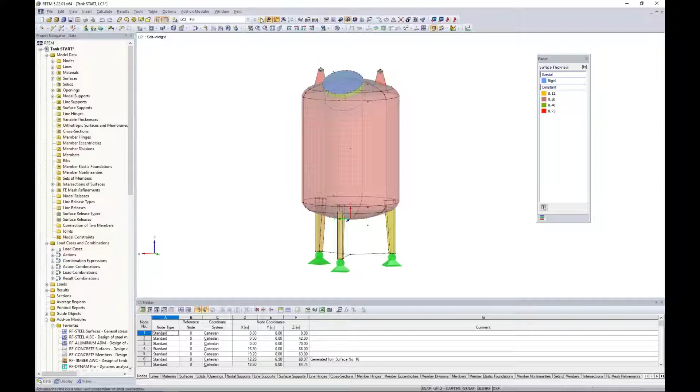We also had applied the loads to the structure, and we can see that within our drop-down box here are our different load cases. We have self-weight, which I don't have any visible loads displayed here because I didn't apply anything to the dead load other than accounting for the self-weight. The load case 2 here is the fill load, and this fill load was just an interior surface load within the inside of the tank.

We also have a wind load, so we can see the windward direction here from the global x-axis. We have a suction force on the leeward side. We also have a compression force coming up from underneath the tank, and we have a tension force up at the top here. Now we also put together all of our load combinations per the ASCE 7. So as we scroll through these, we can see all 3 of those different load cases acting together on the structure.

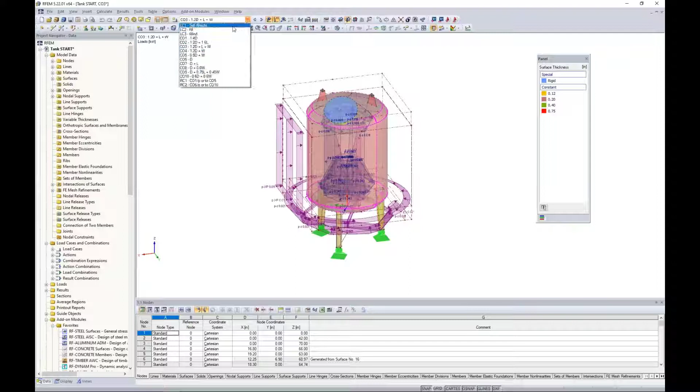So starting where we ended from webinar 1, we'd want to run a calculation, and we can go to calculate all. For the sake of time, I've already went ahead and done so. So what we would be presented once we run the calculation is our results.

Within the project navigator, we should now have this 4th tab available to us called results. I think it's helpful if we just collapse most of these trees here, just to slowly go through all of the visible options, and we'll start off with the global deformations.

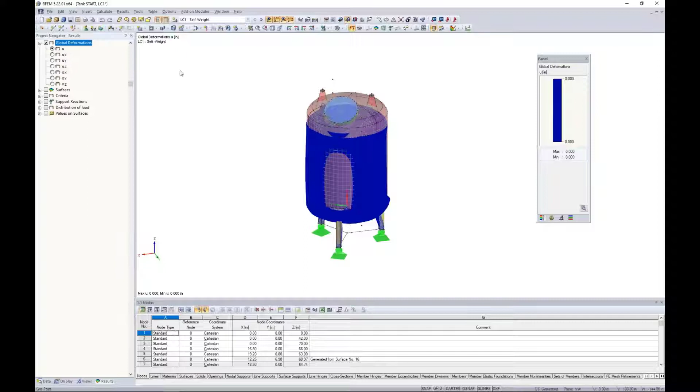So as I'm scrolling through these different load cases and load combinations, and I can go ahead and turn off my loads as well, I'll see the general deflection of the structure. This might be helpful in understanding the behavior under the applied loads. If we see something kind of flying off the page here, then we would understand that maybe we didn't correctly model something, or maybe our loads were incorrectly applied. So it just gives us a sense here if everything is going well.

What else might be important is I'm going to jump back to my fill load. Remember from webinar 1, when I double click on this fill load, we have it increasing linear in the Z direction. At the top of the tank, I want this fill load to be 0, but as we slowly increase the depth, we eventually reach a magnitude of 0.4 kips per square foot, which makes sense since the bottom of the tank sees a higher fill load than the top.

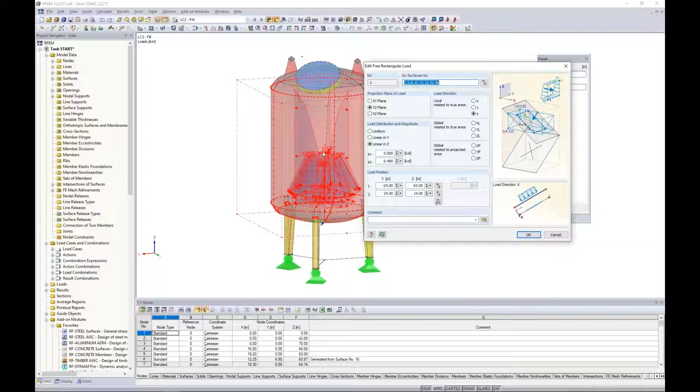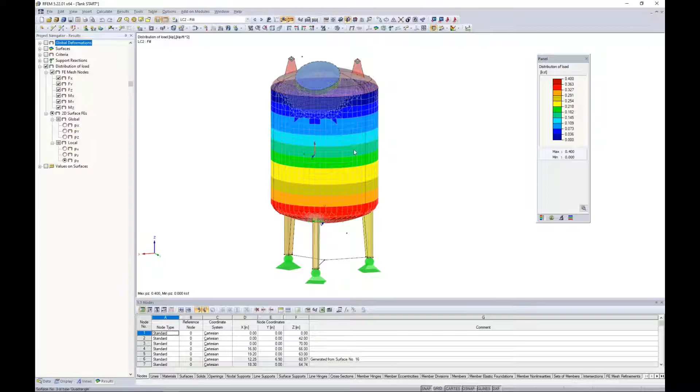So with this load case after running results, I can turn off the global deformations and instead take a look at the distribution of load. When I view the distribution of load in the local Z direction, we can see how this load was distributed on the FE elements. At the top, we have this blue color indicating 0 kips per square foot, exactly what I defined with that surface load. But at the bottom of the structure, we have red contours equal to 0.4 kips per square foot. So that's a nice validation that we correctly applied that fill load.

In a similar sense, we can take a look at the wind load. If I display this load again, we have it acting in the global X direction. Looking at the distribution of the load with these contours, I should see my highest compression force on this windward side, which relates to the negative value here. In the back, we have this suction or tension force, denoted by this yellow positive value at about 0.01 kips per square foot. At the sides, I should see essentially 0 because the wind passes right over each side surface.

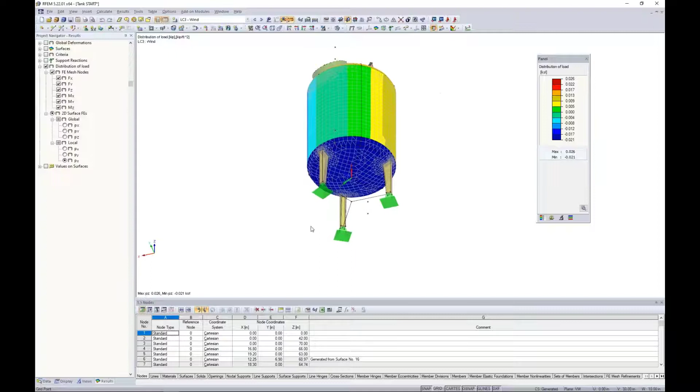And of course, that's denoted by the green color. If we look at the bottom, this shows the correct compression forces. And at the top, we have these suction forces denoted by red with a positive 0.026. So again, just a nice validation to ensure we've applied our loads in the correct manner.

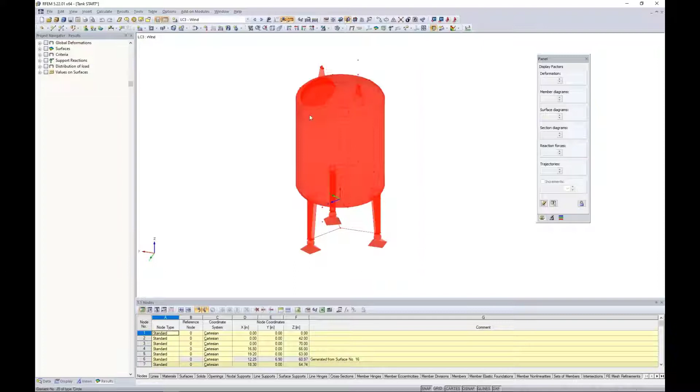We also can take a look at the entire structure by selecting it with my selection box. I can right click and view the center of gravity and info. The program throws up a warning that says some elements have 0 density and won't be included with the center of gravity. We know this because in webinar 1 we created different intersections with our surfaces and deactivated components. We also have our rigid component for the top of our manhole that we wouldn't want to consider for the density, so that's why those are set at 0.

But this gives us information on the center of gravity, and we can also create a new node. It's difficult to see, but there's a red arrow pointing to the center of gravity. More importantly, we can get information such as the surface area and the coating of the surfaces. Why would the coating be important? If we wanted to layer some type of coating or paint on this tank structure, we have the area in inches squared of how much paint might be required. We also have the volume and weight of the material—a general summary of all the surfaces we've modeled.

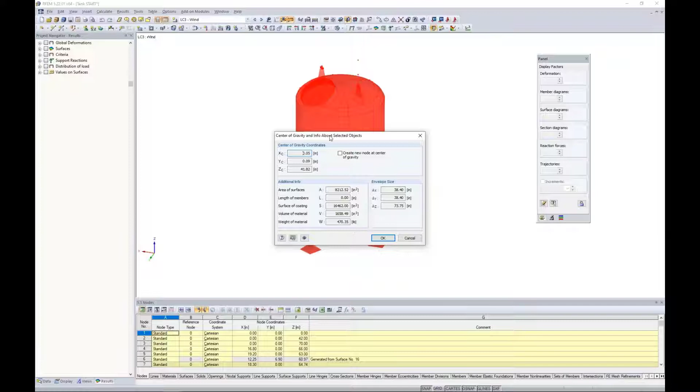In a similar sense, I can take a look at my tables, jumping to results here, which is table 4, to view my results summary. What might be interesting is to jump down to load case 2, our fill load again. We can view the sum of the loads in the Z direction, and you can see it's set at negative 3.03 kips—the total load from that interior fill load I've applied.

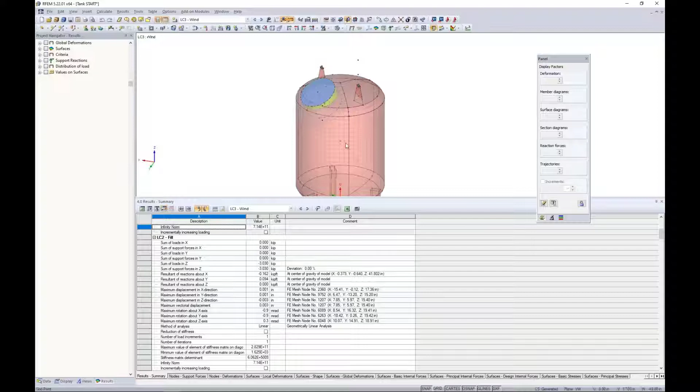We would expect our support reactions to match this sum of loads. So when I activate the support reactions in my project navigator, I turn on the global, making sure I'm under the fill load. We turn on the global Z components, and sure enough, we have 3 reactions in the vertical Z direction at 1.01 each. These add up to the sum of loads for LC2, the fill load, at negative 3.03. So again, just checking here that everything matches up quite well.

Now we can really move on to the results of our surfaces. With this, I can expand my tree here for my surfaces, and maybe we jump to one of these different load combinations here to view our results.

Now, what we have visible to us here is local deformations. These are based on the lowercase x, y, and z axes, so this is related to the individual axes of each surface rather than our global axes.

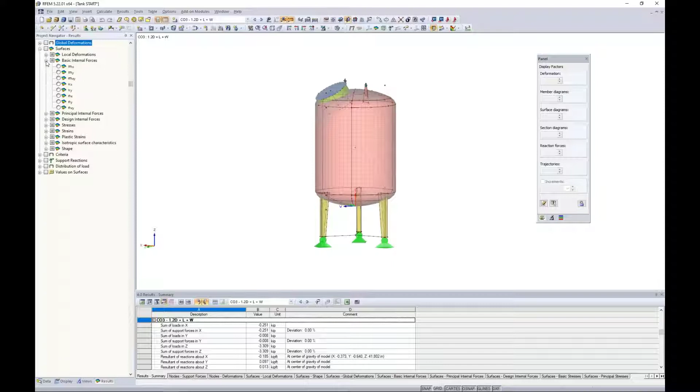But we can also view the basic internal forces. What I'll do here is activate a single surface and change the visibility by the selected objects, then zoom in. Let me also right click to turn on the local axes of this surface element.

So we're currently viewing the bending MX. We also have MY. We can view the shear forces as well as the axial forces, NX, NY, and NXY.

One thing to note here that is unique for surfaces is that MX is not bending about the local axes, it's along the local axes. This is contrary to our belief for 1D members that MX would be bending about the local x-axis. So surfaces or plate elements have a different convention here.

One thing that I think is helpful to understand how these internal forces are calculated, or the convention related to these local axes, is under the help manual. We can take a look at the manual in PDF format for RFEM, or we can also access the online manual on our website. If you go to Dlubal.com, you'll also find under downloads and info, online manuals.

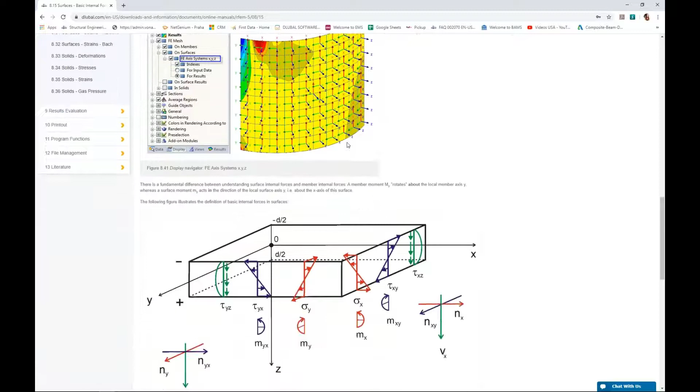I'm currently looking at the RFEM online manual, chapter 8 for results. If we scroll down to section 8.15 for basic internal forces, the reason why I wanted to point this out is because it shows a nice picture of the internal forces in relationship to the local X, Y, and Z axes.

Again, we can see something like MX is bending along the X axis, MY is bending along the Y axis. We also see these axial forces, shear forces all shown here. So this just gives us a little bit better view of how exactly those forces relate to the local axes.

Now keep in mind too that for all of these internal forces, this is true for stresses as well. The equations are directly within the help manual, so if we're curious to know exactly how these internal forces are calculated, again, refer to the manual.

Going back to RFEM then, that will essentially sum up the internal forces. But you'll notice that the next option, if I expand the tree here, is principal internal forces. This is showing me M1, M2, we have N1 and N2. So what exactly is the difference here between the basic internal forces versus the principal internal forces?

The basic is really internal forces related to the freely defined X, Y, and Z local axes, as we already discussed. For the principal, we represent the extreme values of the internal forces, essentially taking the basic internal forces we just saw and transforming them in the principal axis direction. So principal axis 1 will be the maximum value.

So we can see here M1, then we have axis 2, which is the minimum value. We also can display this alpha factor, and the alpha is going to be the angle between the local x or y axes and the principal axes 1 or 2. And we need to increase the trajectory factor here.

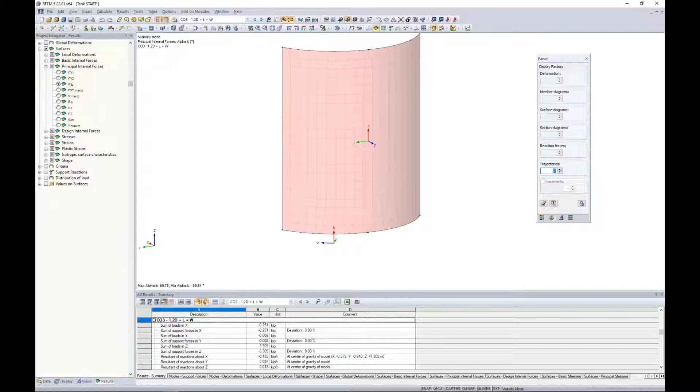So I do so quite a bit, and then we can see down at the bottom, those trajectories are visible to us. Again, that's going to give us the angle between our local x-axis and our principal axes. Now, in some scenarios with a completely straight, flat surface, maybe there is no difference between basic internal forces and principal.

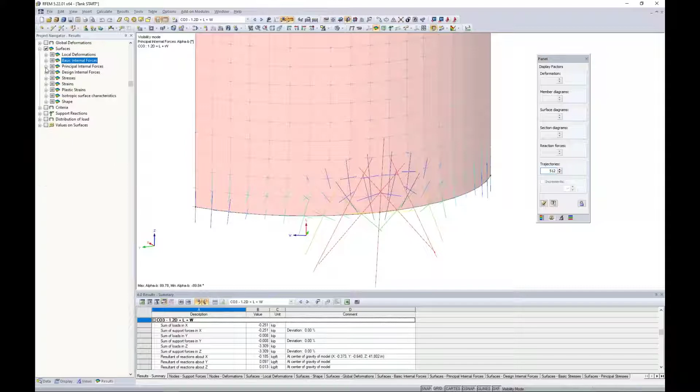Looking at the design internal forces, this is really more relevant to concrete design. We're going to give you the positive and negative bending internal forces for the top of the surface versus the bottom of the surface. You can imagine how that's beneficial for concrete design. This might be used if we weren't utilizing the add-on module within RFEM, but rather wanted to take these internal forces into our own in-house tools or spreadsheets to do design. Now, today we have steel surfaces, so this really isn't of much interest to us.

Now we have the stresses also listed here. As far as the stresses, these are only available within RFEM when you have purchased RF-STEEL, the add-on module. And RF-STEEL, which we'll get into in just a minute, releases these stresses within the main program. So if you did not purchase that add-on module, you would not see the stresses available here.

Now, this is true for all materials, even timber stresses, for example. You would need to purchase the RF-STEEL add-on module, which I know sounds a little counterintuitive, but essentially that's releasing these stresses here that we are currently viewing.

So we can view the normal stresses in the X and Y direction, shear stresses, but we also have the principal normal stresses and principal shear stresses as well, based on those principal axes we just discussed.

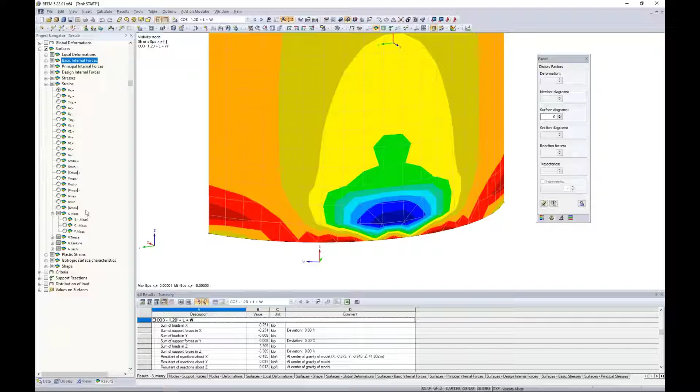We also can close down these stresses and view the strains in a similar manner. So we have our strains based on the local XY axes, principal strains, and then of course equivalent strains as well, which again are based on those 4 different hypotheses shown here, which maybe von Mises is most relevant to our design.

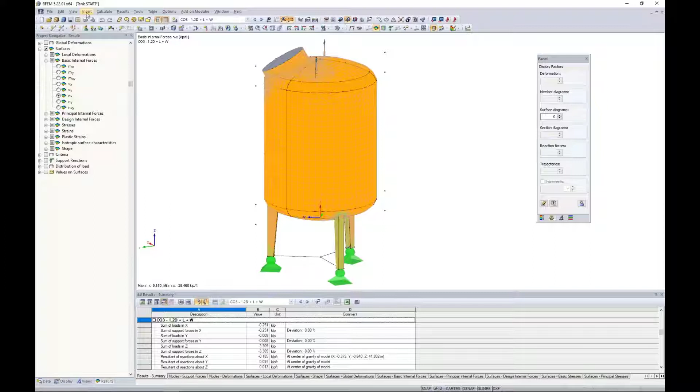Jumping back to one of the basic internal forces here, it doesn't really matter which one. I'm going to cancel out this visibility. I thought it would be a nice feature here, and if I turn off my local axes of the entire structure, what we can do to view the interior stresses of this kind of enclosed tank is to take advantage of our clipping plane. So under Insert, we have clipping plane. What this will do is essentially slice through our tank here so that we can see the interior stresses, and we can set a step distance of 1 inch, for example.

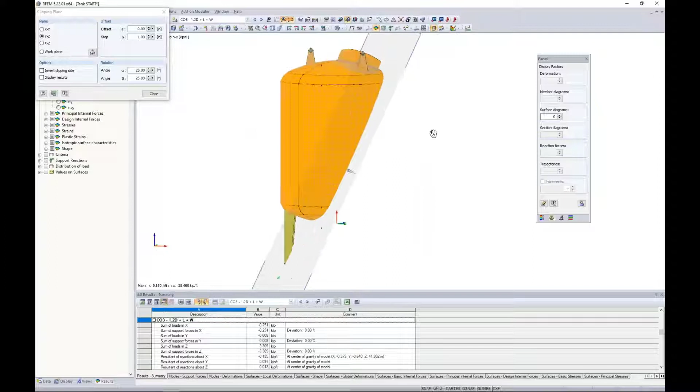And then we can use our offset button here to click around within our structure, which will essentially just cut through that structure with this clipping plane. We also can change the planes that we're viewing, this clipping plane, and even more so, we can change the rotation. So we can change this to 25 degrees, for example. So now we're kind of viewing this clipping at an angle.

So obviously the clipping plane may be an advantage to use when we're looking at these enclosed type structures such as tank elements. Where it's an even bigger advantage, as you can imagine, would be with 3D solid elements. So where we truly can't visualize the stresses on the interior of the solid element, clipping planes can become very useful.

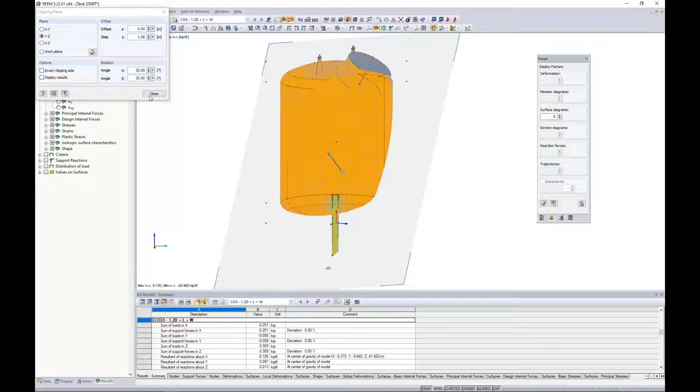So currently, we're looking at everything graphically, but I wanted to also point out that all of this information that we're seeing visually here is also available in table format. And we can view again under table 4.0 the results. Perhaps we jump to the surfaces for the basic internal forces.

Now there's a couple things I want to point out here is that we're currently viewing each surface, and you can see the program kind of syncs up in the background which surface we're looking at. But if we jump down here to surface number 5, you'll notice that only a single point is given to me here with internal force values.

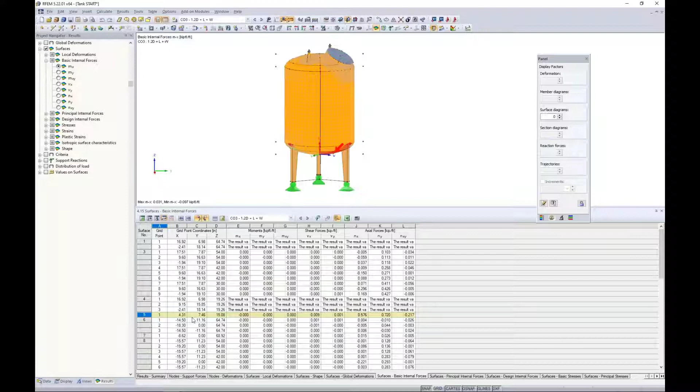So why is that? Well, I'm going to create this visibility by the selected objects to take a look at surface number 5 here. And you'll see that single point given to me right here in the center. This is a problem. Obviously, we're much more interested in the internal forces going on around this entire surface. So why is there only one value given? Well, that's because you'll notice the results are based on grid points.

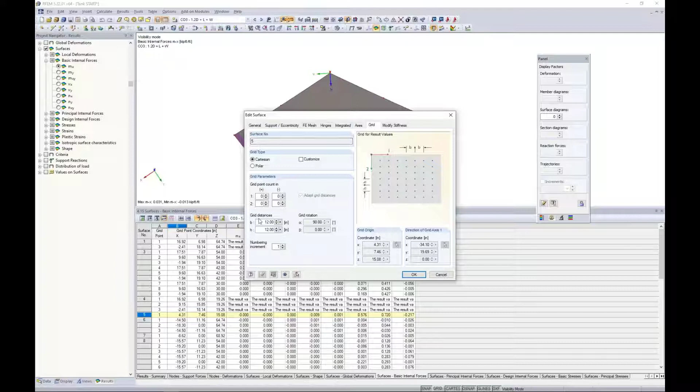If I double click this surface to edit it, we have a tab here called Grid. And by default, the grid spacing is set at every 1 foot. Well, this is entirely too big for our model today. Now, this tank structure is fairly small, so we need to go back, and in webinar 1, we did this with the FE elements. We want to do the same with these grid spacings to change this to maybe something like 0.5 inch spacing. And I click OK.

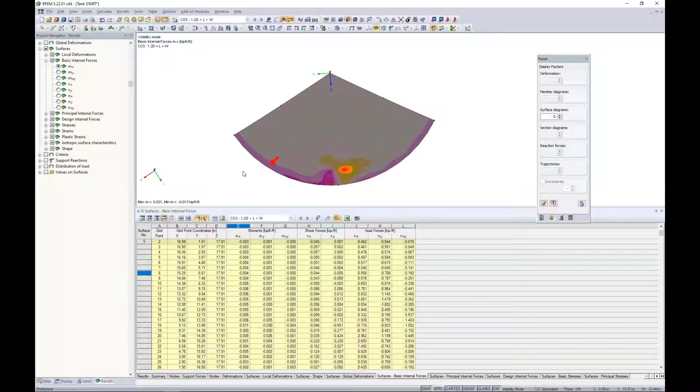So now you'll notice with surface number 5, I have many more points available to me here. So this is obviously going to be much more beneficial than just a single point element. Now the question might be, well, is the analysis incorrect without changing those grid points? And the answer is no. The analysis stays the same. You'll notice that we didn't have to rerun it. Everything that we're viewing visually here is based on the FE mesh element points. And if I turn off my results here, turn off my loads, these FE mesh points are producing the results, and then we can graphically see this with the nice contours.

But when it comes to the table, we're not presenting the results based on every FE mesh point. You can see that it's kind of all over the place, there's really no nice pattern to the FE mesh. So that's why we're presenting it to you in grid points, so that every 0.5 inch spacing we're getting a result.

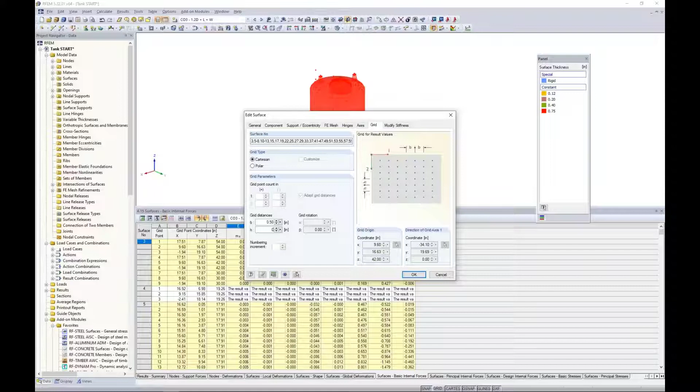Which makes a little bit more sense than necessarily displaying every FE mesh point. So what we would need to do is cancel our visibility mode, zoom out to the entire structure, and select all surfaces. We can double click on them. Under the grid tab, we can change the grid spacing of all surfaces at once to 0.5 feet, and click OK. Now we're going to see much better results within our table.

Now, keep in mind for these table results, we can export this single table automatically to Microsoft Excel. So I can simply click this button here. The program will take this current table I'm looking at and export it over to a Microsoft Excel spreadsheet.

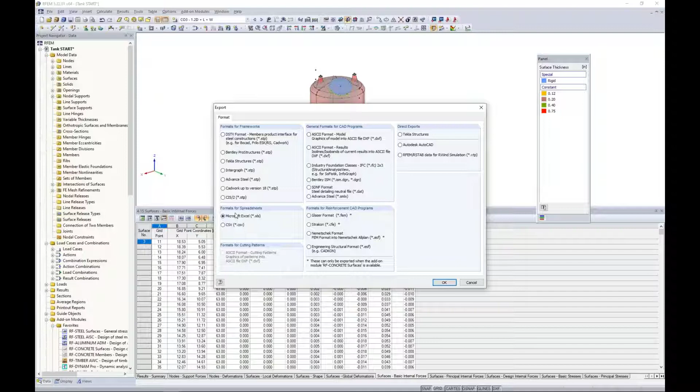If we wanted to export multiple tables at once, maybe for multiple load combinations or load cases, that's possible by going to File, Export. Here we have an XLS format. When I click OK to export to Microsoft Excel, this gives me quite a few more options. You'll notice I can activate my results, for example, and take a look at these detail settings for the selected tables. I can turn on several load combinations or all of them, and also select different tables to export. So you can imagine this is quite a bit more efficient in terms of exporting rather than every single table.

From what I previously showed you. But if you are just looking for a quick export to further sort or filter data, then of course this is possible here. Okay, so that really just gives an overall summary of the analysis results within RFEM.

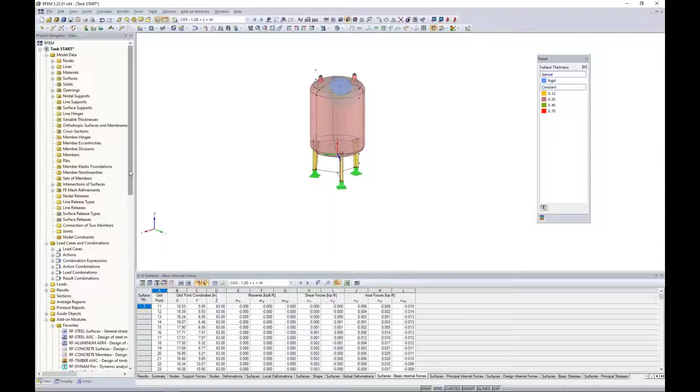What I would like to cover now is the general stress design of these surfaces utilizing our add-on module RF-STEEL. So I already mentioned that RF-STEEL releases the stresses within the RFEM analysis, but it also can be used to do a general stress design.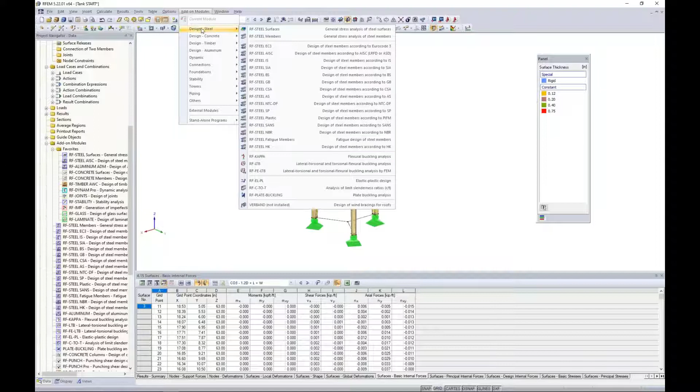So we can access the add-on modules, as I pointed out in Webinar 1, under our Project Navigator. Here's our long list of add-on modules. RF-STEEL Surfaces is at the top because I've right-clicked and activated it as one of my favorites to jump it up to the top here. We also can access all the add-on modules from our drop-down box up at the top under Design for Steel, and you'll see here RF-STEEL Surfaces.

So with this add-on module, as I always like to mention, it's just a simple dialog box that pops up within the main program RFEM. I don't need to remodel the structure, I don't need to redefine loads. Even all of those internal forces and stresses have already been solved for, so all of that information is coming into this add-on module. We're just specifying a little bit more information specific to the general stress design.

Now keep in mind also that this is completely code independent. So we're not designing per any particular code. We're just comparing the stresses from the analysis to the limiting stresses based on the material.

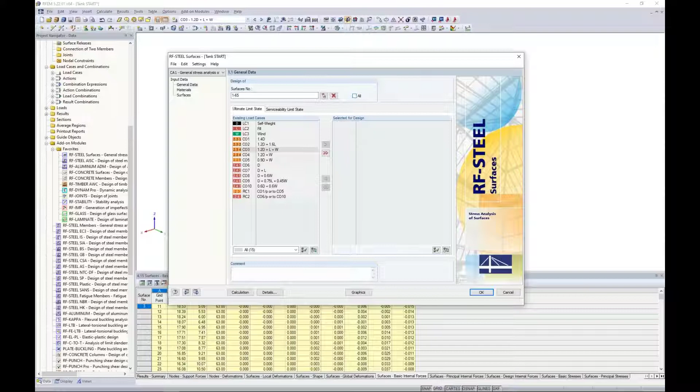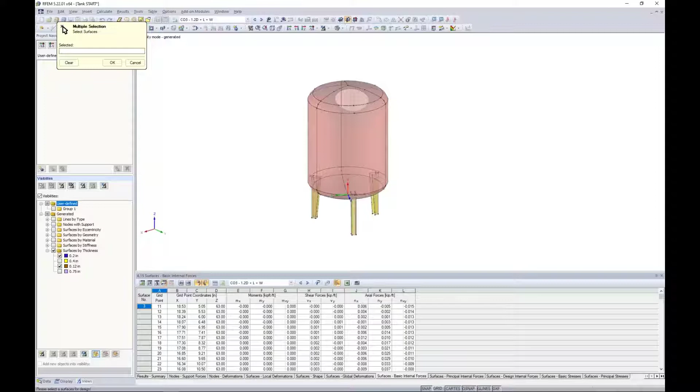By default, the program selects all surfaces to be designed, and I don't want that today, but rather I'm going to graphically select which surfaces. So under the Display tab, under the Views tab, is where I'm going to activate my surfaces by thickness. I'm going to choose here my surfaces that are 0.2 inches thick as well as 0.12 inches thick. So this will highlight only in the graphical view the body of the tank as well as the legs. These are the only surfaces I'm interested in designing at the moment.

You'll notice everything else is hidden, including the components on our roof. When I click OK, all of those surfaces are individually listed out here.

For the ultimate limit state, I want to move my LRFD load combinations over to the right-hand side here to be considered for design. Now, additionally, I could select the result combination to be moved over, or I could just design the result combination itself. If we remember from webinar 1, result combinations are going to be an envelope solution. So I have RC1 here, which would be the envelope solution for all my LRFD load combinations, showing me the max and mins. I prefer to list out the load combinations individually because then I can see my max and mins from each individual load combination, but either are possible.

The serviceability limit state is to check deflections. For my tank example today, I'm really not so concerned with checking deflections, but if we were designing some type of floor element or an industrial structure that's very sensitive to machinery placed on it, where deflections truly are a concern, this is where we would want to move our ASD load combinations over to the right-hand side to be considered for serviceability.

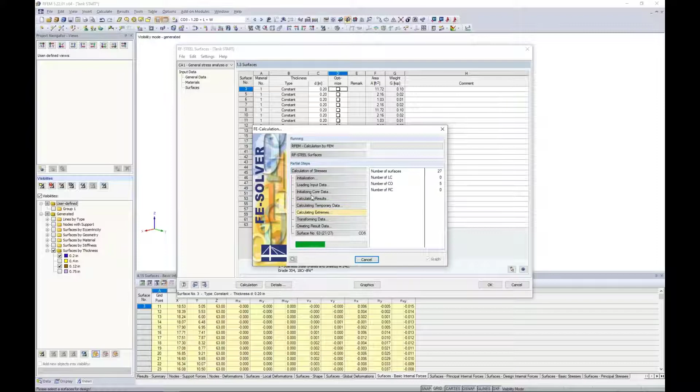So when I run the calculation, we'll actually see that it solves pretty quick, because we already have all of our stresses from RFEM and the analysis for LRFD load combinations. We're just bringing them into this add-on module and comparing to the limiting stresses based on the material.

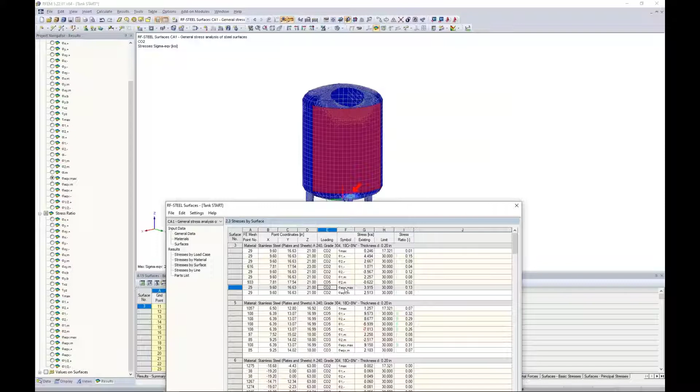So we now have our results tables available to us, and we can view the stresses by load case, by material, or by surface. When I pull this down, we can see that everything again is synced up in the background. We have the red arrow pointing to where the controlling internal force is, as well as the surface highlighted that we're currently looking at.

So here's the column for existing stresses, all listed out. Here's my limiting stresses based purely on the material. And from this information, we get the general stress design ratio.

Now, there are only a handful of stresses listed out here. Under the Details tab, this is where you can control what stresses are turned on or off and used for this design. By default, we have already selected a handful of stresses available. We don't want to check all of them—that's completely overwhelming and may not be necessary for the design. But if you're interested in turning different stresses on or off, you can do so under this Details tab.

So for the most part, most of these stress design ratios look okay. But when I take a look at the filter options here to filter to the max design ratios, and view the summary down at the bottom, I have a max check of 1.4, which is greater than 1.0.

So I'm shown here my red sad face. This is obviously something we need to address. We're over that yield strength. So how can we do so? Well, let's take a look at graphically what's going on rather than just in our tables.

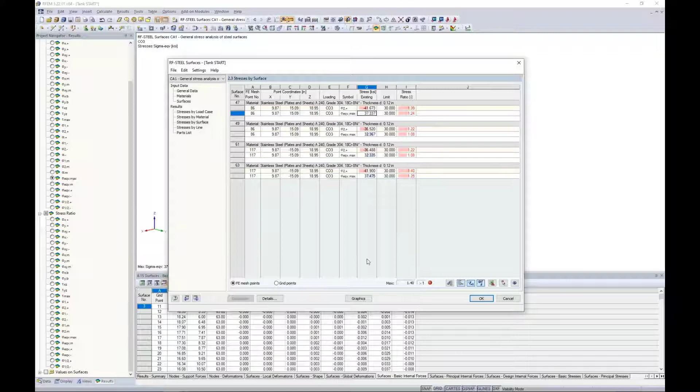I'm going to click here to my equivalent von Mises stresses. You'll notice it's for load combination 3, and I can click on my graphics. Well, most of the tank here, when we look at our von Mises stresses, keep in mind we're still within this add-on module RF-STEEL, we just view the stresses or stress design ratios graphically. When I scroll in here, we just have these teeny tiny points that are really causing the issue, and everything else looks completely fine.

So this is what we would call a singularity. Singularity is not unique to RFEM, it can happen in any finite element analysis software. It's really a point, an FE mesh point, where we just have a very high stress concentration and we're not getting great load distribution.

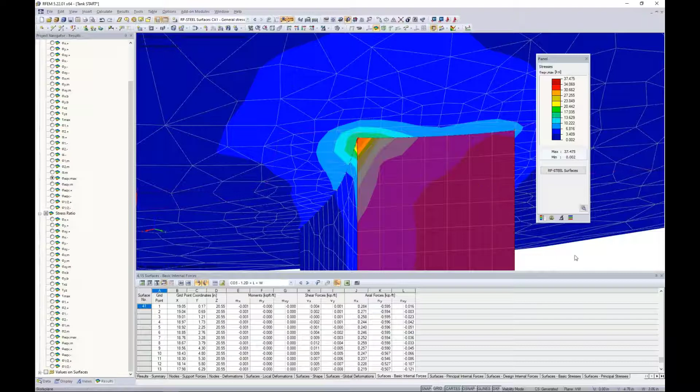And we know in reality where this tank body is connecting to the tank legs here that we're going to get much better load distribution all along this length than what the program is showing me. So how can we better tell the program that the load distribution is there, that these high stress or high peak points are causing the over design of my general stresses to be much too high?

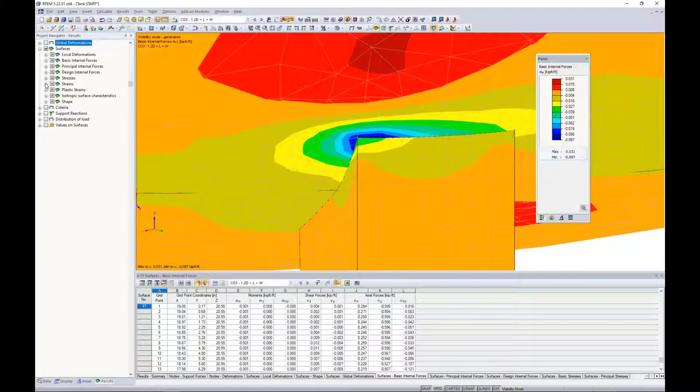Well, let me jump to load combination 3 here, because we have determined that that's the controlling load combination, and I'm going to turn on my von Mises stresses. So this is exactly what we were looking at within the add-on module itself.

Under the display tab, what I've done here is typically what would be available. I know it looks a little bit overwhelming, but again, we can collapse these trees, and eventually I want to focus on this results portion here. We also have these surfaces, which I can expand under the results, and the distribution of internal forces and stresses.

You'll notice here that we have several options for how we display these stresses. The third option is default here, but I want to focus on the first 4 options and what exactly they mean within the program. For this, I'll jump to the PowerPoint.

As far as the display of surface results and those 4 options, number 3 here is default within the program, and we'll get to that in just a minute. But let me begin by explaining that the concept here of these 4 pictures is that we have 2 adjacent surfaces. The surface on the left is denoted by 6 FE mesh elements with their individual boxes, and then we have a surface element adjacent to it indicated by these 3 FE mesh elements.

So when we choose the first option, constant on elements, well, we have every FE mesh element point here, right? We're going to average out those 4 points for a single FE mesh element, and give you that average value right here in the center. Then we're going to base our colored contours only on that average value, so each FE mesh element will only have one color.

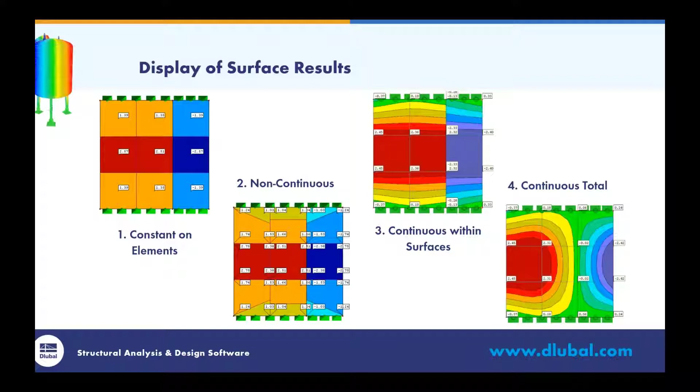So again, number 3 is typically fine, that's why it's default, but there are scenarios, especially when we're looking at a much more local scale here of where these small little elements are connecting in every FE mesh point, that we want to change this to actually constant on elements.

Going back to the RFEM model, you'll notice that when I have this as default, continuous within surfaces, my von Mises stress is set at 37 KSI. When I change this to constant on elements, each FE element has its own color, and the stress drops significantly from 37 KSI down to 16 KSI. That's a huge difference. This doesn't relate to what's right versus wrong with the analysis itself, it's purely how we're viewing our results graphically. Just by changing this view, you can see how much those stresses are impacted.

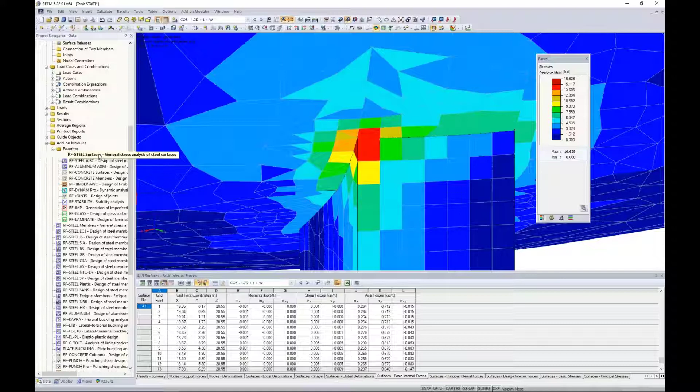Now, when I go back to the add-on module RF-STEEL, let's launch this add-on module. I want to point out that I changed my display, as we saw back in RFEM. But when I'm looking at the total stress design ratios, they're still showing 1.4, which we know is wrong since our highest equivalent von Mises stress is only 16, so we should be well below this.

Well, the reason why is under details, we need to set this under the options as well. We would change the distribution of internal forces to constant on elements. Although we've changed it back in RFEM, the add-on module has its own separate option here that we want to change. When I click OK, the program says it needs to recalculate the results, so we let it bring in those internal forces again. It compares to the limiting design stresses, and sure enough, you can see my max design ratio is now 0.62.

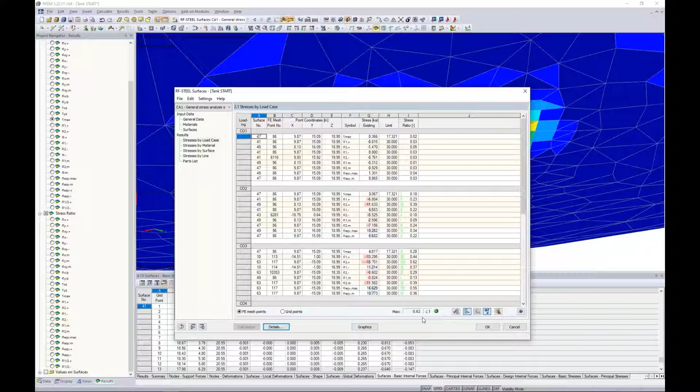So just by changing the view of our results, we can significantly impact the overstress design ratios within the add-on module. Now, with that said, if we take a look here at stresses by surface, the von Mises stresses for example, and I jump to my graphics view again.

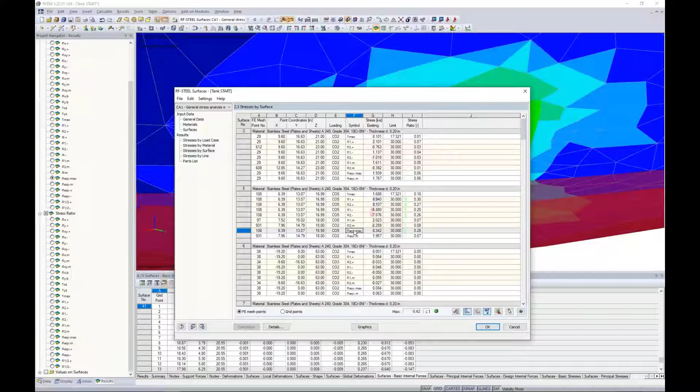I'd still like to point out, though, we took care of this high design stress ratio. We're definitely sitting much better, but I'd still argue that there's a singularity still occurring at this location. If you look at the rest of the structure, the stresses are so low, but when we look at these FE mesh points, they're still relatively high.

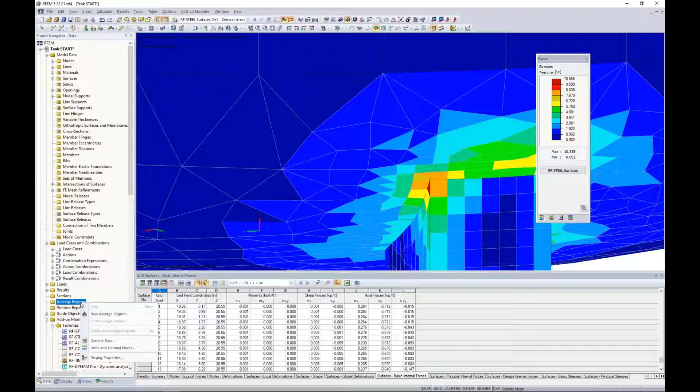So I want to take this a step further to address these singularities by applying what's called an average region. Under the Data tab, I can access a new average region by right-clicking on it. We launch the dialog box, new average region, and it's exactly as it sounds - what we're going to do is average out the internal forces over a particular region.

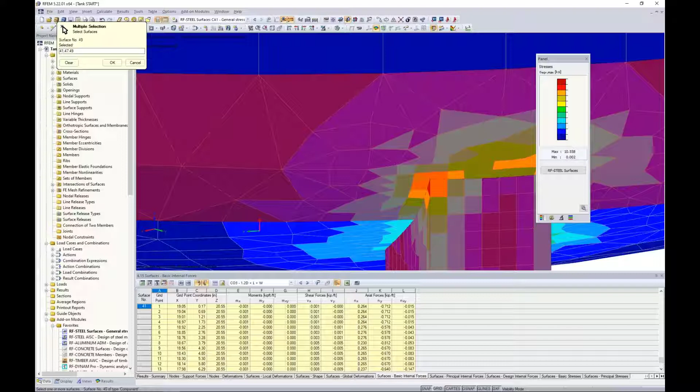This is quite powerful because I can select multiple surfaces here to be considered. So we'll select the tank body, and maybe I also select these two surfaces from my tank leg. I click OK. So we need to define the average region as a circle as well as the dimensions, and the dimensions I will set this at 2 inches.

Now, the question we may get is, how big to set the average region? This really depends on your project, and it's up to the engineer's discretion. We're working with a very small tank here, so 2 inches is adequate to apply this smoothing region at this particular location. But you can imagine if we set this at something like 2 feet, that's entirely too big to average out the internal forces. But 2 feet might be perfectly fine when we're averaging out a concrete slab where we have a column framing in. So again, it really just depends on your project.

We want to tell the program where to place this average region, so graphically I can select this node here. The coordinates are automatically populated. I'm going to choose all 4 checkboxes here - this averages out the internal forces in all directions, based on the local axes U and V of the average region versus the local axes X and Y of the surface. We need to specify a projection direction, and we have the global X, Y, and Z axes given to us here, but from RFEM Webinar 1, we remember that working with this circular tank structure, we're not so much able to relate the model to these global axes so easily.

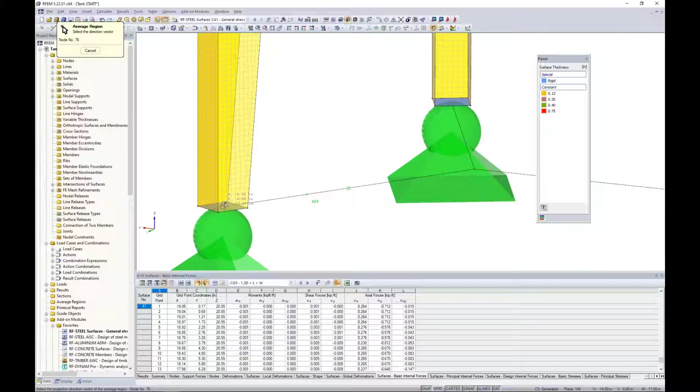We remember from the first webinar we created all of these points. Zooming into the bottom of my leg, I'm going to choose the center point here. My second point is going to be the center of the tank structure as a whole.

Now this projection direction was automatically calculated, and you can see the parameter set here. We want to distribute the internal forces through all surfaces. When I click OK, it might be better to turn this to a wireframe view.

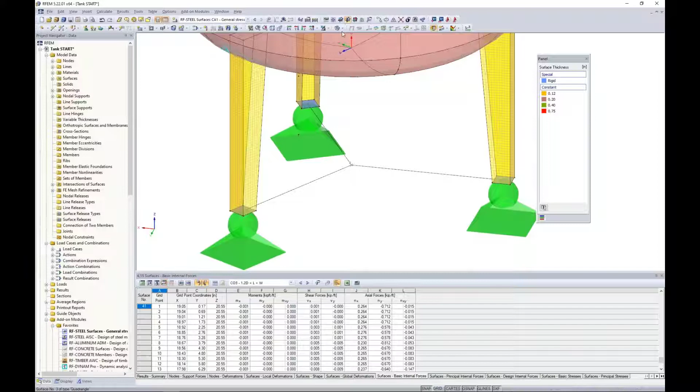We have an average region defined here. I know it's a little difficult to see, but you can see that we've applied this 2-inch average region. It's being projected towards the center of the tank structure.

When I apply this average region, I'm going to view my results for load combination 3, and we can turn these on. I'll maneuver my model here and zoom into this point. I'm currently viewing my von Mises stresses, and notice we no longer have these high peak forces here. We're instead averaging out over this 2-inch diameter region for those von Mises stresses.

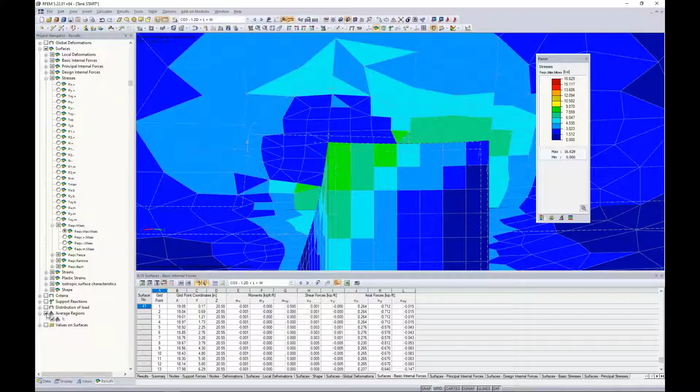Now, when you apply average regions, you have a new checkbox in your results where you can turn on and off the average region. So if I turn it off, well, here we go—there's those high stresses visible to us. We can activate the average region again, and they completely disappear.

We'd want to continue adding these average regions to other locations where the legs are framing into the tank body, just to alleviate those high peaks. For the sake of time, we won't be doing that today, but hopefully you have some insight on how to apply average regions for odd structures like this.

Obviously, a flat surface would be much easier to apply an average region to in terms of the projection direction and such. Now back under the Data tab and RF-STEEL Surfaces, in a very similar manner that we saw previously with the display of internal forces...

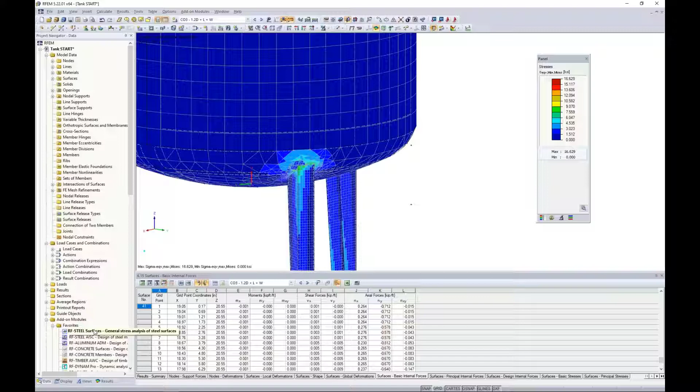Under the Details tab and under the Options tab, we do need to apply the smoothed internal forces from the defined average regions. Otherwise, they will not be considered. So we just take that extra step within the add-on module to say yes, please consider them with the design.

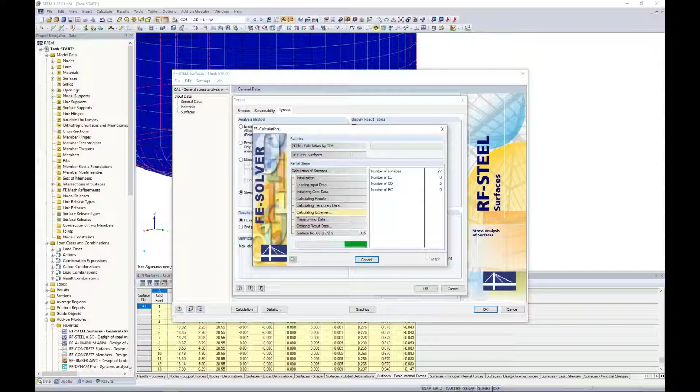The program will cycle through the quick analysis again, and we will be presented with our results. Now, I didn't apply the average regions to the other locations, so we're still seeing the same design ratio, but we would expect this to fall significantly, and then maybe we could optimize our tank thickness quite a bit further.

All right, so that really explains a general stress design for these surface elements utilizing that add-on module. The next thing we'd like to discuss is the stability design, and in particular, the buckling behavior of this structure, and we'll be relating that to imperfections.

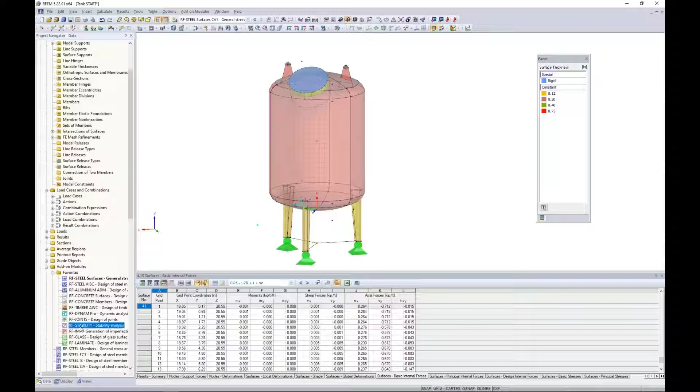So I'm going to launch RF-STABILITY from my list of add-on modules here. When I do so, the add-on module has a similar feel to what we saw with RF-STEEL Surfaces. Now it's a little different—this is going to allow us to run an eigenvalue analysis on the structure.

In previous webinars, I've used RF-STABILITY to track down instabilities. We all know that instabilities can be incredibly frustrating within a finite element software, so RF-STABILITY can be extremely helpful in tracking down where exactly we may have a problem. But today I'm going to be utilizing the add-on module to do a general buckling analysis to identify modes of failure for the structure under the applied loads.

The number of eigenvalues needs to be defined, and the default is 4, so we'll leave that as we have it defined here. We want to import either a load case or a load combination. My worst case scenario has been load combination 3, and you certainly want to import a load case or combination that has the highest axial forces.

We know that this is going to give the worst buckling failure modes, as opposed to importing something that's applying tension forces. For example, the program will throw up a warning that says it can't apply the eigenvalue analysis for buckling because we have tension forces. So something to keep in mind there.

Now, the stability analysis calculation method by default is set to an eigenvalue analysis. This is a linear analysis, and this is what we'll first be running through today, just for a quick calculation. Keep in mind that nonlinearities within the RFEM model will not be considered.

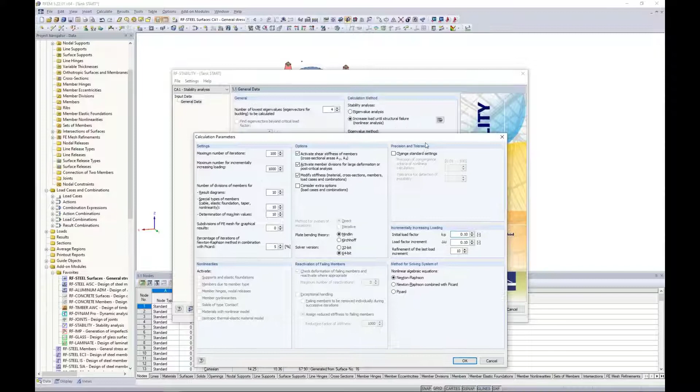We do have a second option here to run a nonlinear analysis, and this will consider any geometric or material nonlinearities back within the main model. We also have the ability to incrementally increase the load. I'll get into this section a little bit later on at the end of the webinar, because I think it's actually pretty powerful in what we can do with a nonlinear buckling analysis. But for my initial calculation here, I just want to run a linear analysis to get the basic buckling failure modes.

Now, when I click calculate, the program runs through these first 4 eigenvalues. You can run up to 100 eigenvalues if you want, but it really doesn't make much sense when we're looking at those higher eigenvalues, because the buckling mode failure will probably never occur—it's taking extremely high loads to even see that type of buckling mode. So that's why we set this at 4 eigenvalues, and this will just give us the general failure modes within our structure today.

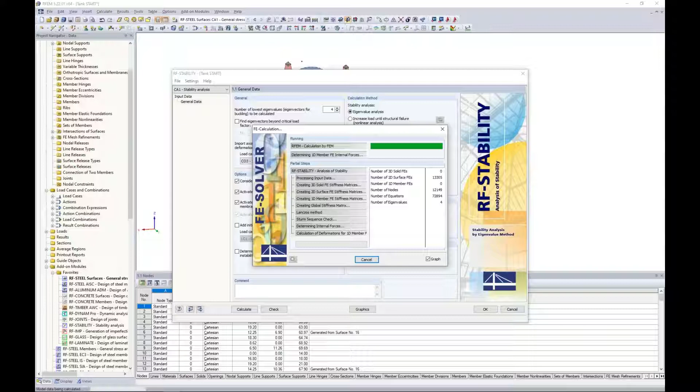Once this is done solving, we're presented with our results here in table format, and we see the first 4 eigenvalues given to us. We can also scroll through these, and you'll notice in the background the RFEM model is synced to whatever mode shape we're currently viewing. It looks to be essentially buckling of this leg on the right-hand side for the first 4 eigenvalues.

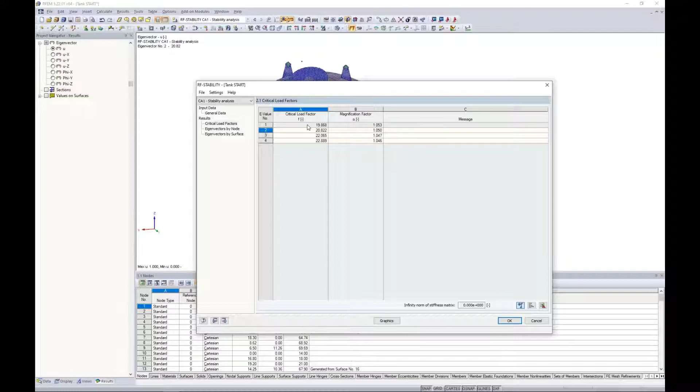We're also presented with the critical load factors. These critical load factors are the value that you can multiply load combination 3, which we imported before, by to see the failure buckling mode shown in the background here. So you can imagine that additional eigenvalues may not be so relevant when we're getting into higher numbers. But of course, if we were solving for higher numbers, we might see buckling of the other 2 legs, or even buckling of the tank body itself—something to play around with.

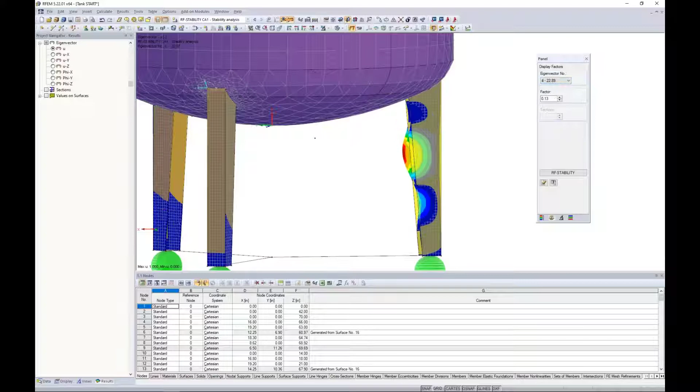Looking at the first eigenmode shape, we can jump to our graphics view. Now, once again, we are currently in the RF-STABILITY add-on module. I'm just viewing my results graphically here, and under this second option within my panel, we can also drop down to the different eigenmode buckling failure modes if we'd like. So everything here has to do again with this leg on the right-hand side.

The eigenmode is shown to us here, and I can actually right click on the boundary line element of my leg surface. When I right click on it, I can choose results diagram. This brings up the buckling mode shape in a results diagram format. Let me turn on the Y direction here so we can see the buckling behavior of that leg element along the line.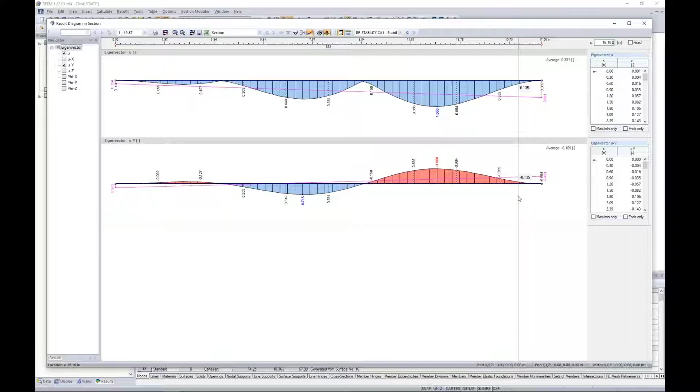Now, the reason I'm doing this whole procedure is because I want to relate this buckling to modeling imperfections. We all know that when constructing a tank or any type of structure, there are installation errors, maybe incorrect construction methods, or elements that aren't properly manufactured, and inevitably we have imperfections. Everything that we are modeling within the RFEM program here is essentially perfect, and this is true for any general finite element analysis—all lines are perfectly straight, and all elements join together at every FE mesh point.

When we know that in reality, lines probably won't be straight, surfaces aren't all in one plane—mistakes happen, and there are tolerances given for these mistakes. This comes from the AISC Code of Standard Practice, in particular Section 7.13.1. It discusses misalignment of members and surfaces, and these tolerances can be less than L over 500, where L is the distance between working points.

Keep in mind that L is not the distance between the start of my surface and the end of my surface, but rather the distance between working points, where I see my inflection points. So looking at the general buckling view here, I take a look at the first inflection point taking place at about 10 inches, then scroll over to the end at 17 inches. This would give me a working point of about 7 inches in total.

So what we want to do here is model the imperfection, keeping these tolerances into consideration. I also want to backtrack and mention that AISC 360 tells us that we should really model these imperfections directly. There are other alternative methods such as applying notional loads, but in some way or another they should be accounted for.

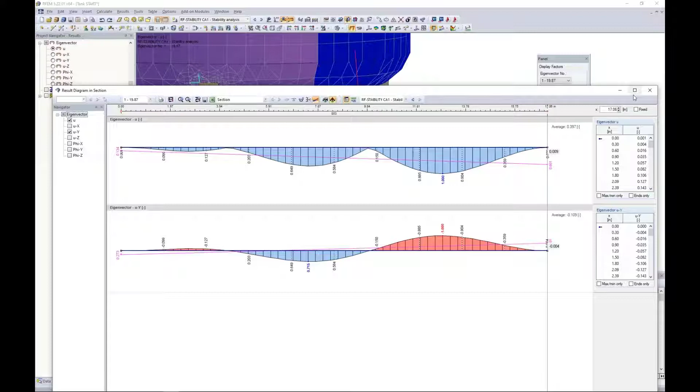We'll refer to the AISC Code of Standard Practice. Now that I have my working distance here, notice that because RF Stability just runs a general eigenvalue analysis, nothing is given to us in terms of a length. Everything is unitless, so this buckling mode ranges from 0 to 1.0. What I like to do is model this imperfection that can potentially occur and scale it based on L over 500. With my L being 7 inches divided by 500, we'd want to scale this to 0.014 inches.

This is where I'm going to activate my other add-on module called RF-IMP. RF-IMP is pretty powerful because it allows me to import a buckling mode from RF-Stability. So we'll choose our first buckling mode, and I'm going to scale this because, remember, RF Stability is unitless. We're scaling to 0.014 inches, given to us by the AISC Code of Standard Practice. We can actually generate the pre-deformed FE mesh in order to affect the imperfections of the surfaces.

So when I click calculate here, the program is actually going to deform the FE mesh based on the scaled buckling mode. Then we'll be able to consider that before we even run the additional load cases such as dead, live, or wind load.

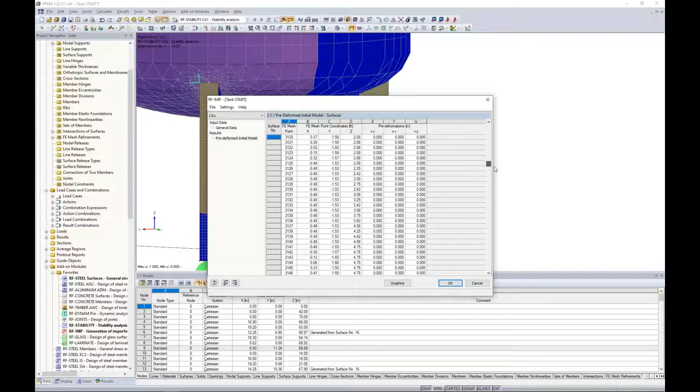After IMP is done with the calculation, I can see every single FE mesh point listed from my model, and most are set at 0, 0, 0 because nothing's really changed. But we eventually get to a point where some of these values are being modified - you can see the big red arrow. The program's telling me it's going to deform the FE mesh at this location based on the scale of 0.014 inches that I gave it. So now this can be considered as an imperfection and we can directly model it.

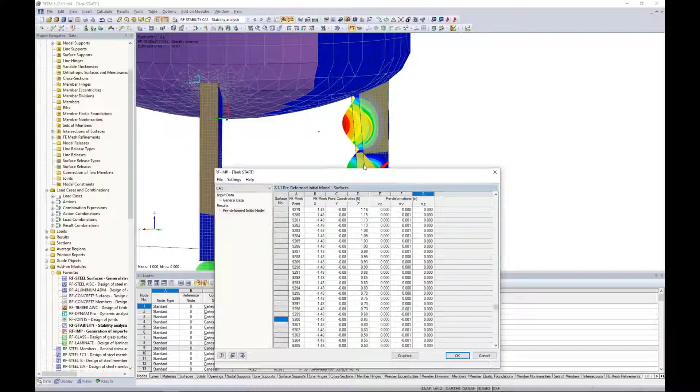Once I'm done with the deformed mesh, I need to go up to my load cases and combinations. We visited this dialog box in quite a bit of detail within the first webinar. Under the Load Combinations tab, remember we generated all of our load combinations automatically according to ASCE 7. I'm going to create my own manual load combination, which I can select from this button in the lower left-hand corner, and replicate load combination 3. I'm going to call it 1.2 dead plus live plus wind.

So this is identical to load combination 3 we're seeing up here, but I'm going to take it a step further to apply my imperfection, that deformed FE mesh. I move all of my load cases over to the right-hand side to be considered, and change my load factor for dead load to 1.2. Under the calculation parameters, we have the extra options button, which allows me to activate my deformed mesh from RF-IMP. So that imperfection, the deformed mesh, is now considered with these load cases I've defined.

I click OK, and we can run this load combination by starting our results. Now I'm running according to a second order analysis just to give us some quick results. Maybe in reality we'd want to run according to a third order analysis to get even further into the details. So I went ahead and ran this, and I'm reviewing our stresses on the structure just like we've seen before.

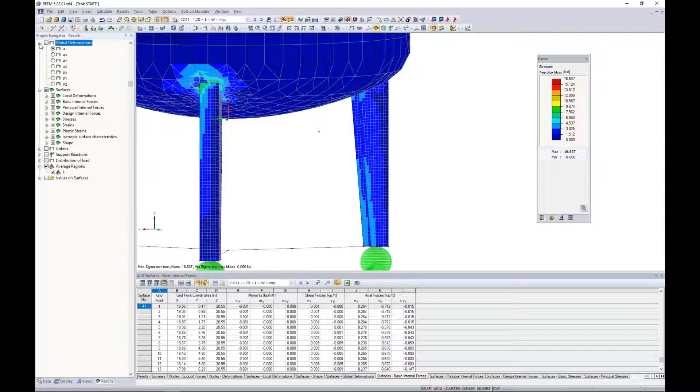But in order to make sure the deformed mesh was applied, I did notice when I turned on my global deformations in the Y direction that we can see this buckling kind of mode shape with the deformed mesh is considered.

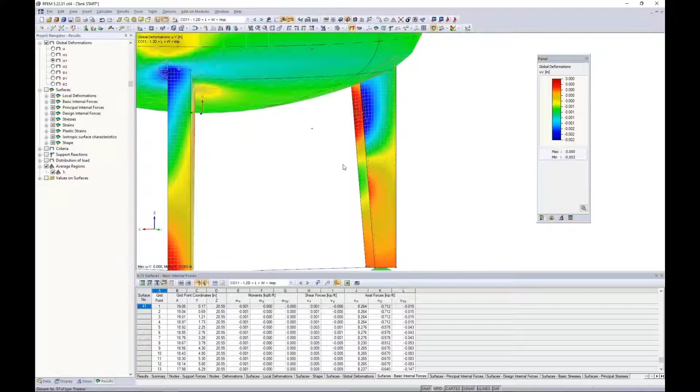We have ever so slightly some deflection here in the Y direction that indicates that mesh was deformed. Possibly with a third order analysis too, we could see even more of those results available to us. But this in general is just one way that we can directly model these imperfections, because not everything is going to be perfect as we're modeling here.

Rather there will be errors with the manufacturing or installation process. So the final thing I'd like to show you today relates back to RF stability, as I mentioned we would touch on a nonlinear analysis for the buckling behavior of the structure. Instead of going back to the add-on module, I'm going to access my load cases and combinations again. Under the calculation parameters, if you remember, I briefly showed this to you in RF stability for the nonlinear analysis. We actually have all those same options directly within the RFEM program itself under the particular load combination.

So we can incrementally increase a load here until our structure fails. You do need a license of RF stability in order to access this information. The reason why I'm doing it here in the load combination itself is because we have a couple other options that are not available to us within RF stability, so it's slightly more powerful here.

So what I'd like to do is to once again create a new load combination, and we will call this one 1.2 dead plus live plus wind plus our imperfection. Taking it one step further, we will check out this structure until it completely fails with this buckling method. So load combination 12 here is still considering the imperfection, plus we're going to activate the incrementally increased loading. So what exactly can we do here?

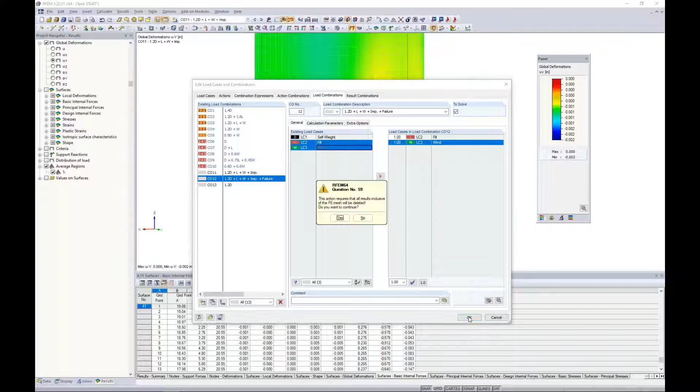I do want to change this to large deformation analysis. Finally, under the General tab, I need to move both the live and the wind load over to the right-hand side. Notice I did not move the self-weight, because we've already accounted for it under the second tab here, to use the initial loading so that it's not increased. Once we have defined this load combination completely, I can click OK, and the program asks me to clear the results. That's fine, and we would want to run the calculation by clicking on this show results for this single load combination.

For the sake of time, I went ahead and did so, just because it does take a minute to solve. We will be presented here with our deformation, our results for this particular load combination.

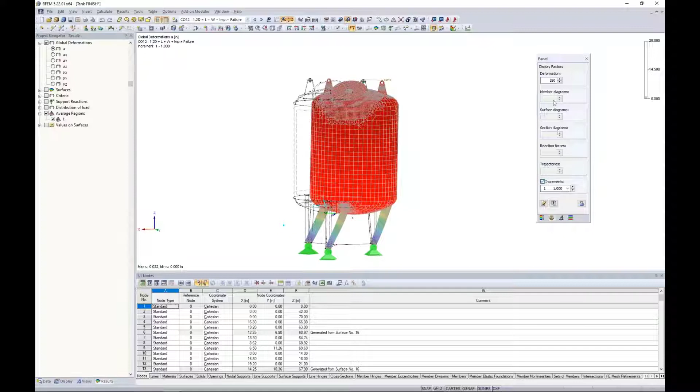What we have the ability here is to view the different increments. Remember, that was one of the checkboxes I just selected. So maybe I change my deformation factor to 30, so it's not quite so big. We can lock that down here so that it doesn't change as I change my increments.

The other thing I'd like to do is under the Display tab, I'm going to hide my results, and we're going to look at this FE mesh settings. Now it's default here to show the FE mesh on the surfaces, but I'm going to change that to the surface results. So as my structure begins to deflect here, the FE mesh will also follow. It just makes the view a little bit easier to see what's exactly going on.

So here's my first load increment. 100% of my loads from load combination 12 are applied. But now I can begin to scroll through these different load increments to see the structure deflect under 800%, 900%, 1,000% of the loads.

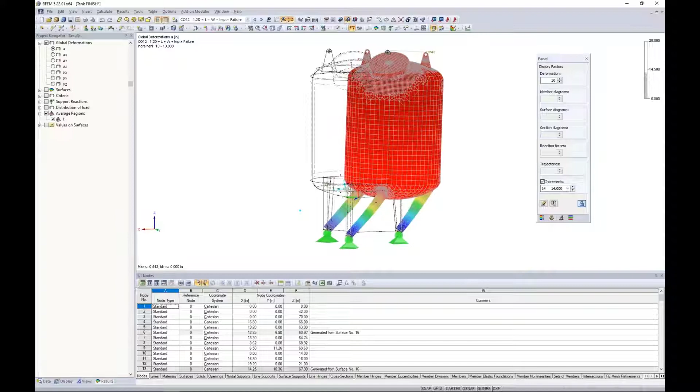And what will be most apparent here is if I take a look and I zoom in, we can actually see the buckling of that leg element. And I can even take my leg here and highlight it by choosing the visibility by the selected objects, so we can really see the source of failure for this particular leg, and we can continue on with the additional load increments.

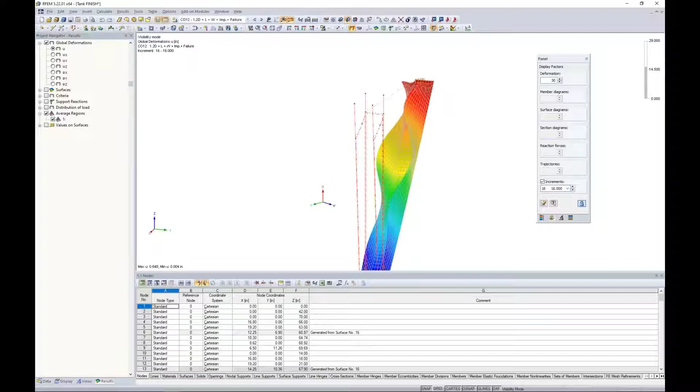Now I can activate the rest of my structure here graphically. So as we're reaching these higher load increments, the structure is still holding on. We're seeing very, very large deformations here. Of course, the deformation factor is set at 30, but obviously the leg is a problem until we get to a point that the program says, okay, I can't handle any more. It's reached 29 load increments and the structure has completely failed.

So we might be interested in the load increment 28 here, and we can even scale down our factor to 10 just to see the moments right before the structure fails.

Now, these load increments are pretty high, but you can imagine that when we're dealing with a much more sensitive structure, an existing structure, that we want to see how different applied loads on the structure can impact the failure mode, then this might be a very interesting approach within the program. Then we can determine how we would want to modify the structure.

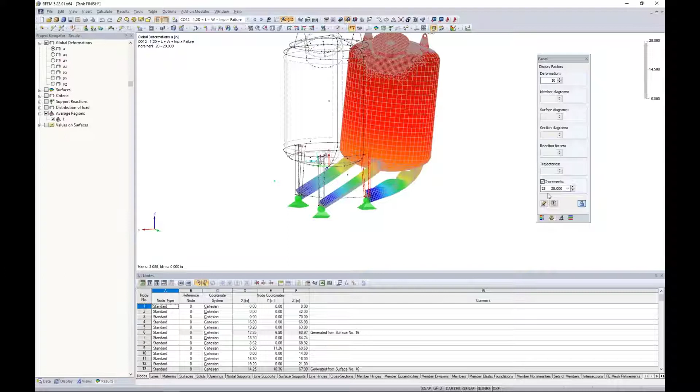Okay, so that is essentially going to conclude our webinar today, and I will jump back to the PowerPoint for just a little bit of closing information.